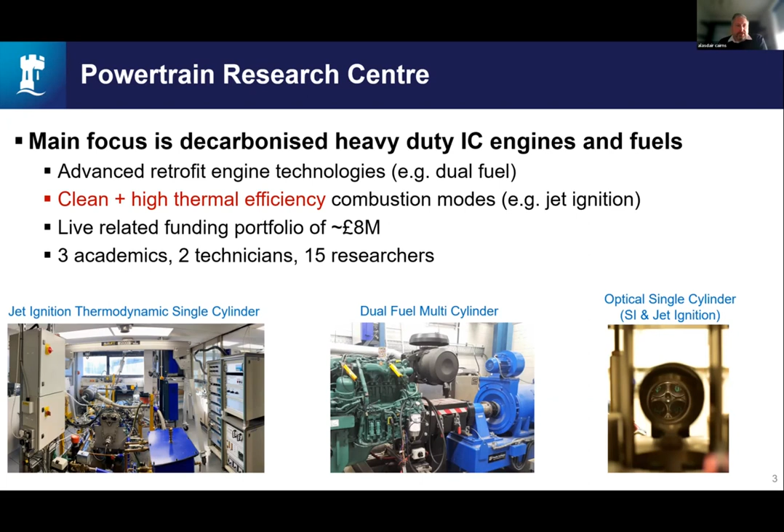On the screen you can see some examples of the facilities we've got. Bottom left shows a single cylinder research engine that can be operated at very high speeds and loads. In the middle we've got a dual fuel generator set or marine engine - that's a diesel engine that's been converted with a second, cleaner fuel. We've also got optical engines and combustion chambers, so we can cover all the things that we need, really. So that's a little bit about the group.

So we have to decarbonise, and ultimately we have to stop getting carbon out from under the ground. That's the inherent problem we've got.

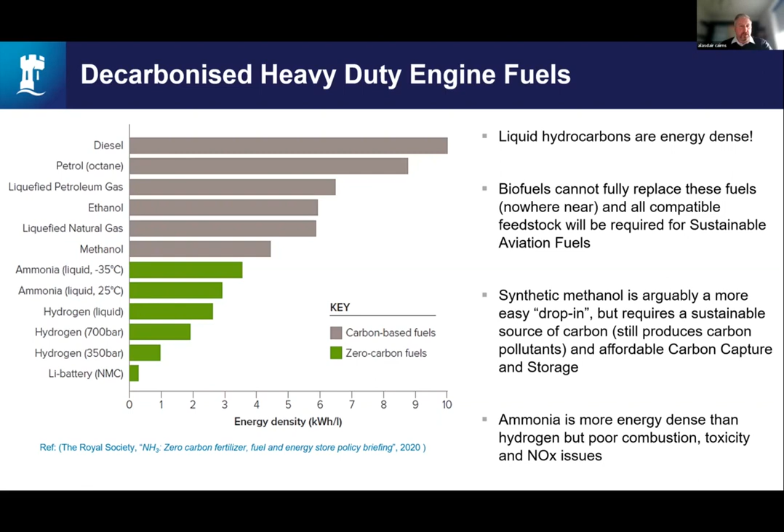So we're actually working on all the fuels because we think there's a place for all of them and we'll need them all to get to net zero, but they all have their individual challenges and none of them is a silver bullet. When we specifically look at ammonia, there's a few other points to think about.

Usually with ammonia, a lot of feedback that we get is it's toxic, it's very dangerous, and it is. But we already do move a lot of ammonia around the world as fertilizer. It's the main fertilizer we use globally.

The problem being, we move ammonia around the world in ships at the moment, and we do it using diesel. Seems highly counterintuitive. So there's a lot of interest in actually converting these ships to use the ammonia as the fuel.

So while it's attractive to look at new uses for ammonia, and we need to do it, a key point to note is we also have to clean up the existing usage of ammonia away from transport, and do that in parallel while looking at using it as a new fuel for transport.

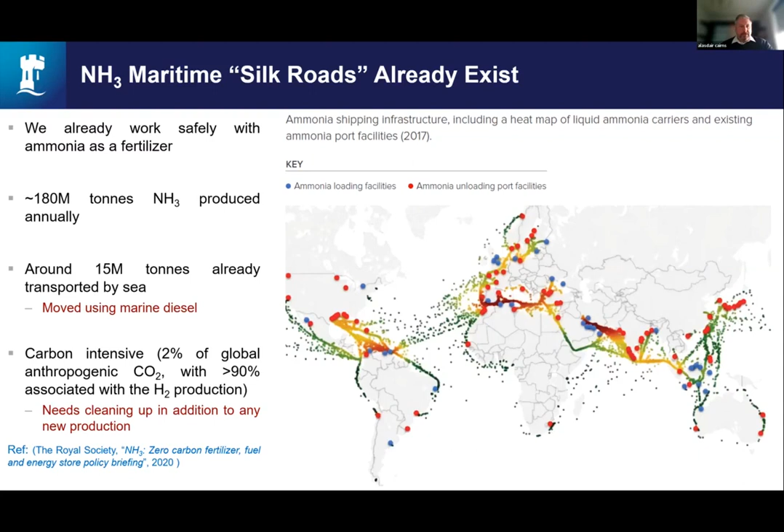So that's a little bit of background on ammonia. So what are we doing at Nottingham? We've got various projects now underway looking at using ammonia, hydrogen and methanol as an alternative fuel.

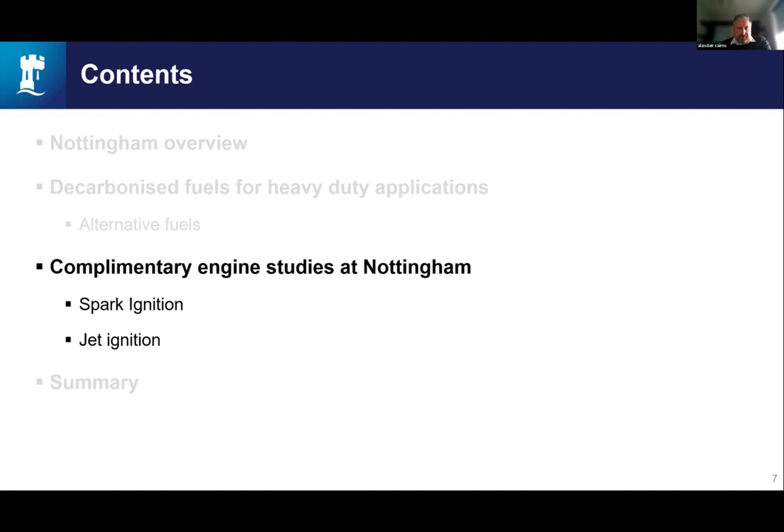One of the projects we've got, which is why Tony kindly invited us to come and talk to you, is a new programme grant which we've called MariNH3. This is funded by the EPSRC, the main funding body for UK engineering research in academia. It's just started - it's quite a large project, but what we're trying to do is look at the optimum end use of ammonia across the maritime sector.

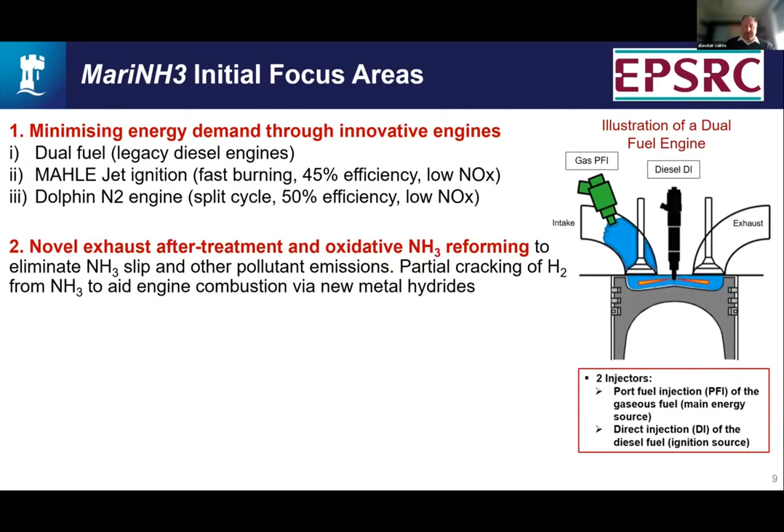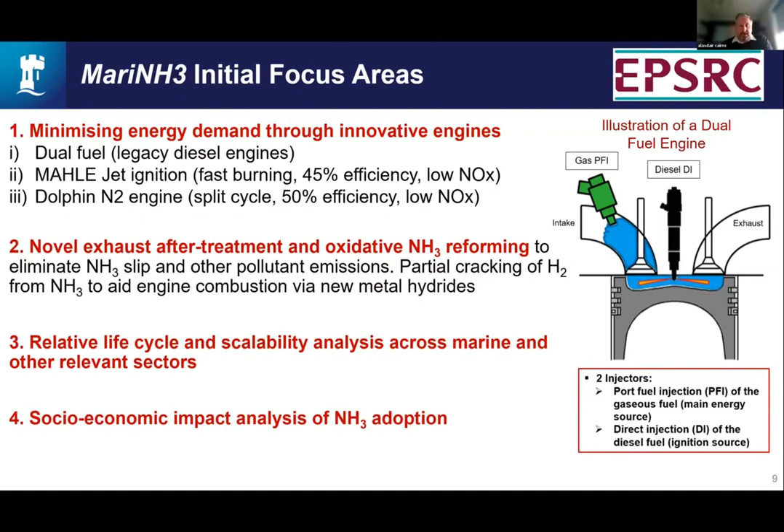And as I said earlier, the life cycle and scalability analysis, and also the acceptance criteria, the socioeconomic impact around using a fuel that's toxic. So that's a very brief overview of some of the objectives we've got.

What I wanted to do for the last part of the presentation was actually show you some of the engine results that we've got. So whenever you have a new fuel, as an engineer, it's important to have a certain degree of skepticism over its operation and be realistic about it. And actually, we all had a healthy degree of skepticism around ammonia, but some of the results we've seen already are very encouraging in the engines that we've been running.

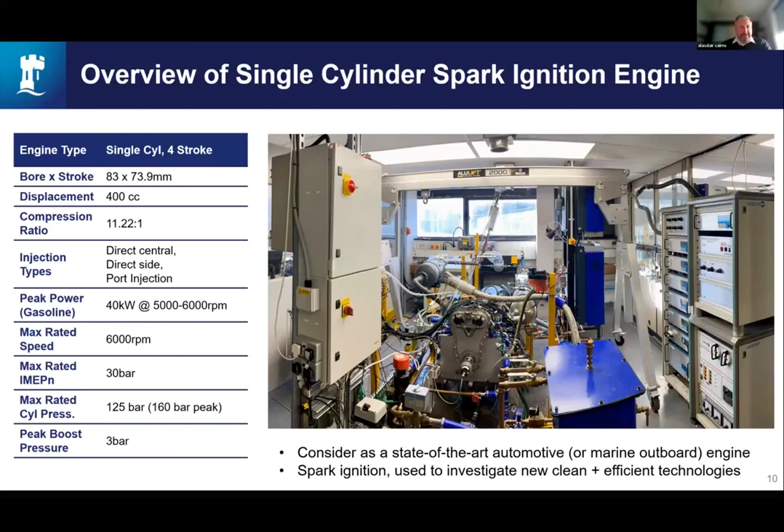So what we have looked at in our initial experiments is we always start the engine using E10. We run it up to a fully warm condition, and then we co-fuel the engine. We start to introduce some ammonia and back out the amount of E10 until hopefully we're running on 100% ammonia. Keep in mind, it's a very bad fuel in terms of being a very slow burning fuel.

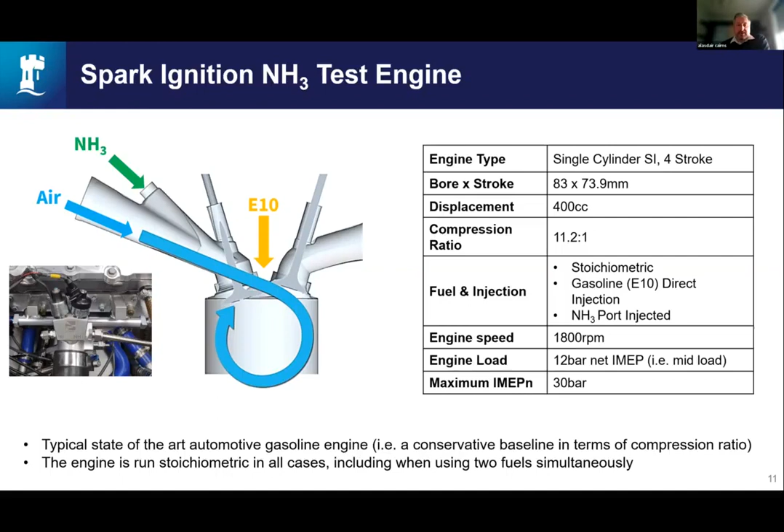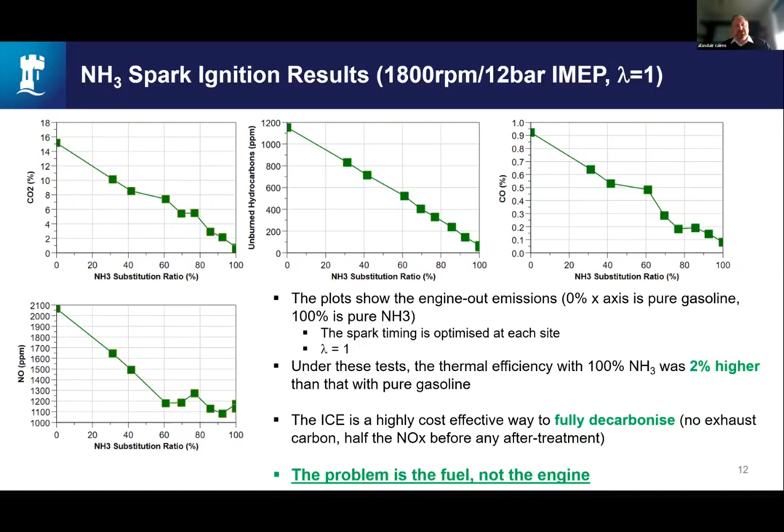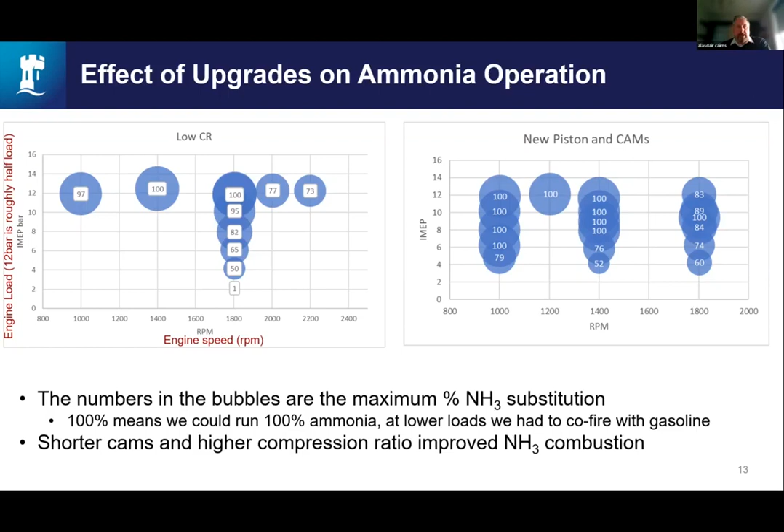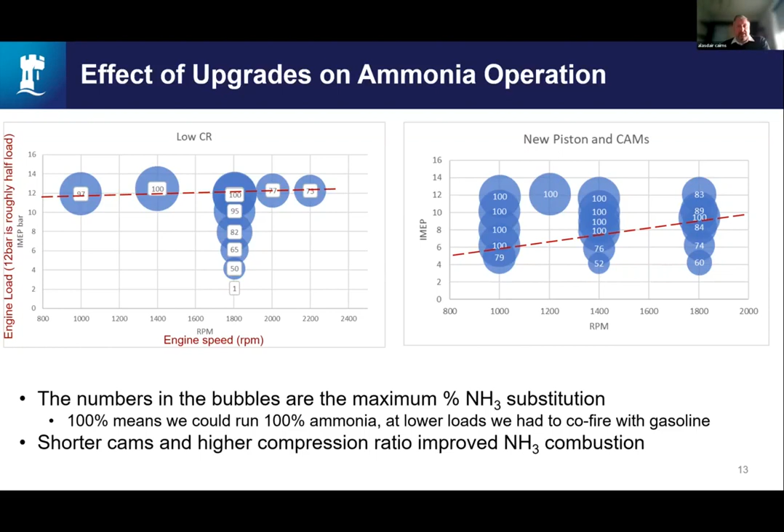If I superimpose a low load limit line on the figures, you can see we're able to operate the engine at lower loads. That's the ultimate goal really - we want to run this engine on 100% ammonia so that we've fully decarbonised it everywhere. We're not quite there yet, so there are other things we're looking at in parallel, including cracking a little bit of hydrogen to enable us to leave it on otherwise just ammonia fueling. So that's the first set of results we've had. We haven't actually published these yet - they'll be published this year.

As well as looking at normal spark ignition, one of our key partners at Nottingham is a company called MAHLE Powertrain, and for the last 15 years or so, they've been working on a very novel engine combustion system.

Ultimately, those species ignite the rest of the charge. In the pre-chamber, there's only about 5% of the charge - it's a small volume. So you're using these highly reactive jets to create a much bigger flame zone, meaning we can run the engine very efficiently, with very fast combustion, and also very lean - extremely lean.

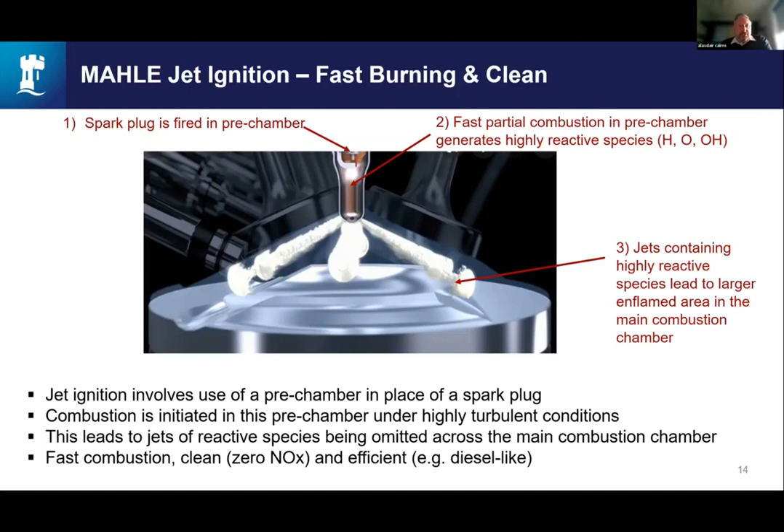That's without any after-treatment. So hydrogen internal combustion engines also do not have a NOx problem if you use an appropriate combustion system and size them properly so they don't spend their time at much higher loads - making them bigger, for example. That's also quite exciting, and we're carrying on working on that as well as the ammonia work.

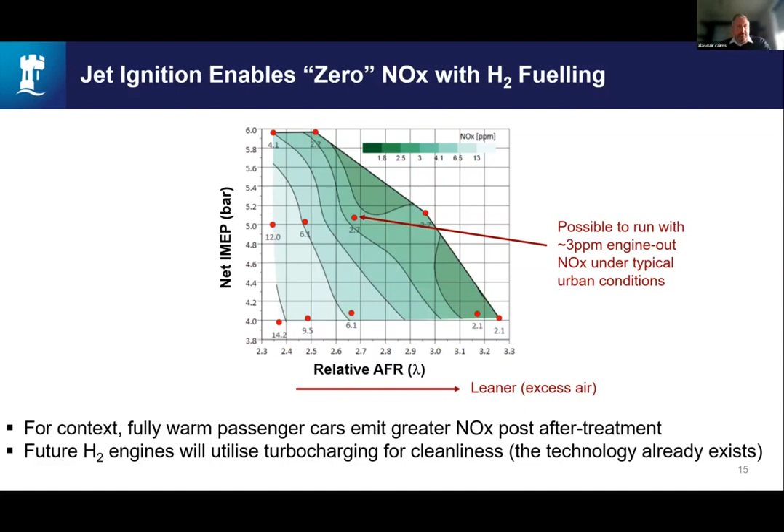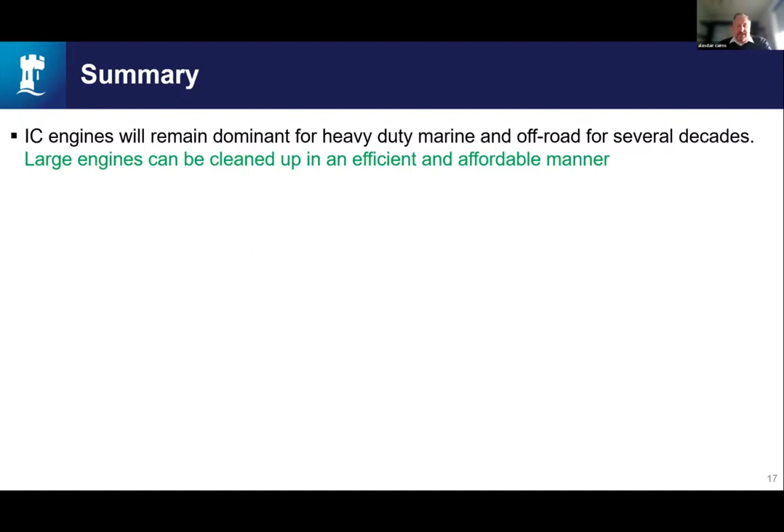So to summarize, that was just a snapshot of some of the work we're doing on marine and NH3. Engines will remain critical for large, heavy transport applications where batteries have an energy density issue. However, it's important to stress there is no silver bullet - all of the fuels we looked at will be needed if we're going to decarbonize more quickly. We need them all. We just need to understand the best use of each of those fuels. They all have a part to play.

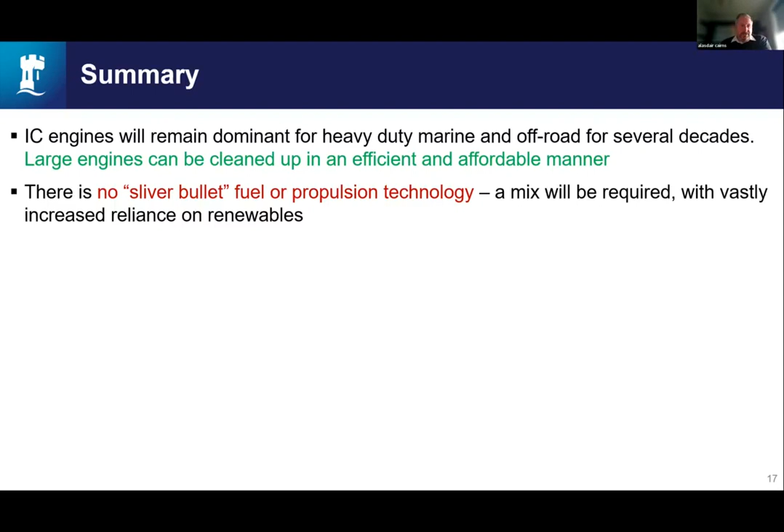Biofuels, however, the feedstock probably needs to go towards aviation, which is very challenging otherwise. Hydrogen is really attractive from a combustion stance and an emission stance, as we've seen. But the problem is moving it around - how you store and move hydrogen around over long range. That's where ammonia comes in, and it's only because of that problem with hydrogen that ammonia is attractive as a hydrogen carrier.

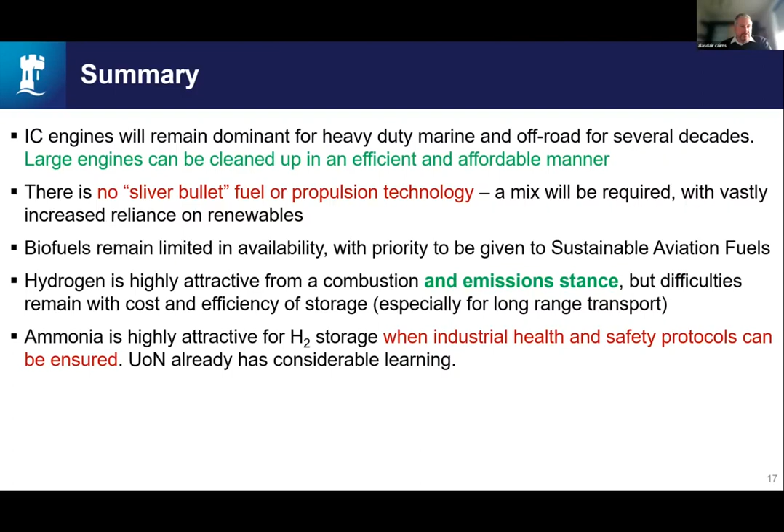If we're carrying it around as ammonia, we should try to understand if we could use it directly rather than being inefficient and converting it back to hydrogen for end use. What we've seen at Nottingham so far is you can use ammonia as a 4-stroke engine fuel - it's not restricted to 2-stroke. It would be very unlikely, though, that you'd be able to start an engine from cold using ammonia; you'd still need to start it and pre-warm it on a second fuel. And the NOx emissions need full characterization - we need to fully understand the full impact of all of that.